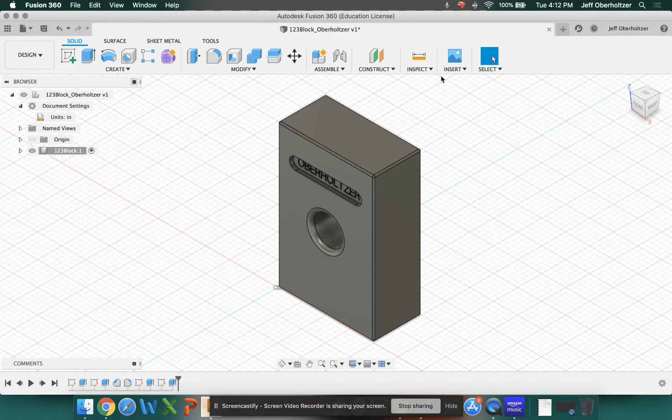For our block, we want to punch a series of holes down through this side. In order to do that, we go up to the top left corner to choose Create Sketch, the green plus mark. This time we want to choose the tall face, this one right here of our object. I'm going to click there when it highlights.

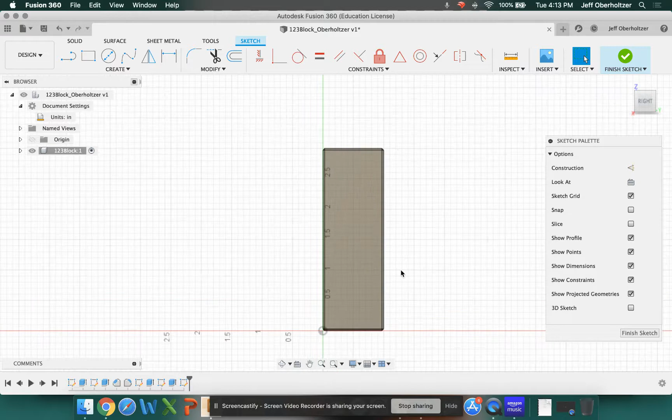Now we're going to create a series of holes down through the side. We only need to draw one though. In the past, I've told you measurements for different things, but this time we're just going to draw one, and I'm going to show you how to position something using the dimension feature.

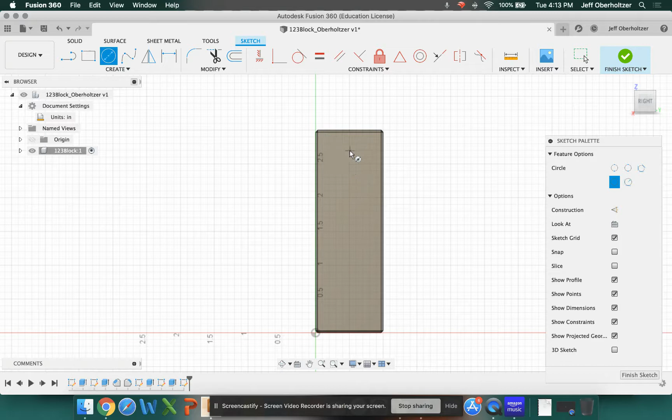The first thing we want to do is choose our circle, so center diameter circle. On purpose, even though I want it to land in the center, I'm going to draw it kind of off to the corner. You don't need to do this, but it's just to illustrate what I'm doing a little better. I'm going to select a random point and pull away with my mouse.

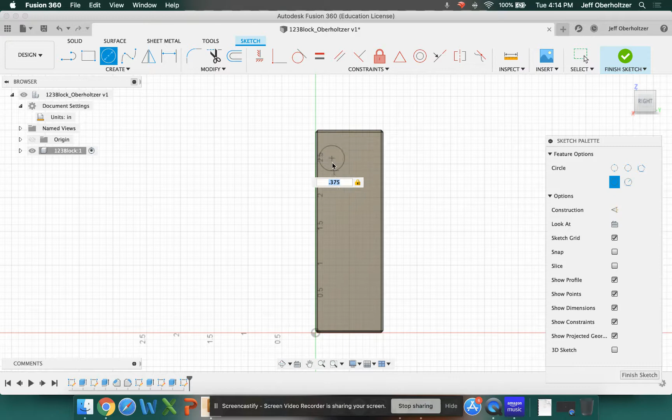I want the diameter of this circle to be 3/8 of an inch, or 0.375. Now, at this time, this circle is not positioned where I want it. I'm just going to hit return, and you'll notice it's off here to the side.

What we're going to do now is use our dimension feature, which is right up here - it looks like an H. You're going to click Sketch Dimension, and the first thing we want to do is get our hole centered. If I hover over the edge of this circle - I don't recommend that you use the center point, click on the edge of the circle. Fusion will understand what you're going for. When it highlights, click on it.

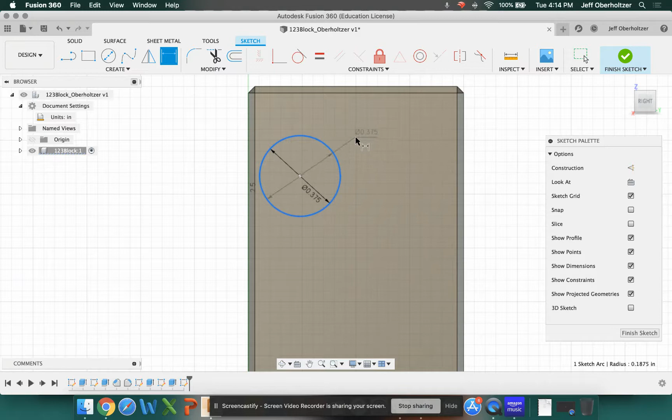Now it's asking me for a diameter, but I don't need to do that. I'm going to choose the outer edge, and it actually doesn't matter which one you use, but make sure you don't pick up the chamfered edge. Pick up the outer edge right here - it'll turn black, click once. Now you'll notice if I drag up, I have a dimension attached to that.

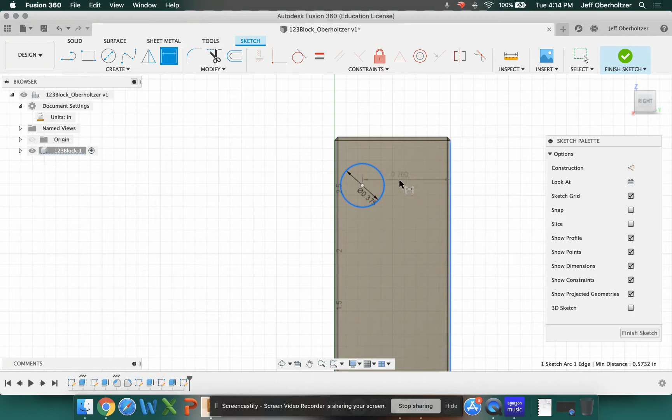And that's exactly what I want. Move it off of your drawing - you can do it on your drawing, but it's poor practice. When you click one time, it's going to request a dimension. I want it to be centered, and we know our block is 1 inch thick, so half of that would be 0.5. When I hit enter, watch what happens to the circle. It has referenced this outer edge, and it's moved the circle. Now that's exactly a 1/2 inch, and it's locked there.

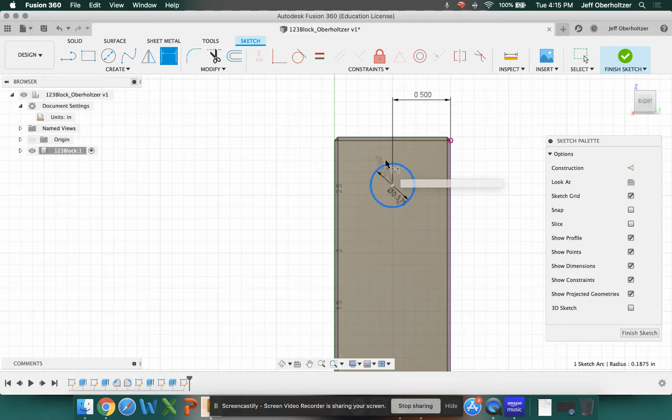The next thing we're going to do is make this circle a 1/2 inch from our top edge. I'm still in the dimension function - you notice my cursor has that dimension line on it. If I choose the circle again, and then choose this top edge, it turns black. Now when I pull out to this side, I have another dimension. When I click, I'm going to type 0.5 and hit return. That has now properly located that circle a 1/2 inch down from the top and a 1/2 inch in from the side.

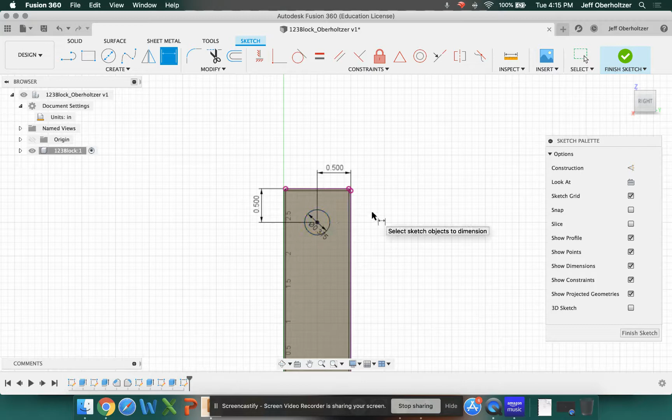At this point, we're now going to create a rectangular pattern. We're going to go under our Create tab. Down here towards the bottom, you'll see Rectangular Pattern - I'm going to choose that. The first thing it's asking me is for objects, so all I want is the circle.

Now you'll see that there are arrows, and if I wanted to, I could drag those. You'll notice it automatically creates a pattern, but I don't actually want that. I want to type in my references for this. So what we can do - this one says direct distance type extent. That's what we're going to use this time, and it will automatically spread them out in that extent.

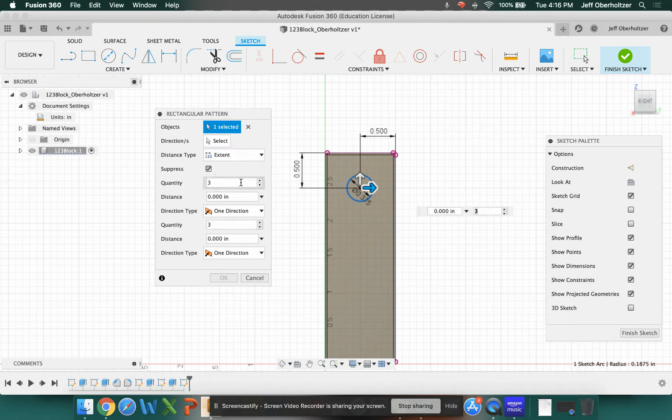I don't need my quantity going across to be more than 1, so I'm going to change that to 1. The distance is 0 inches. Now I want my second quantity down here to be 4, and my distance is going to be -2.

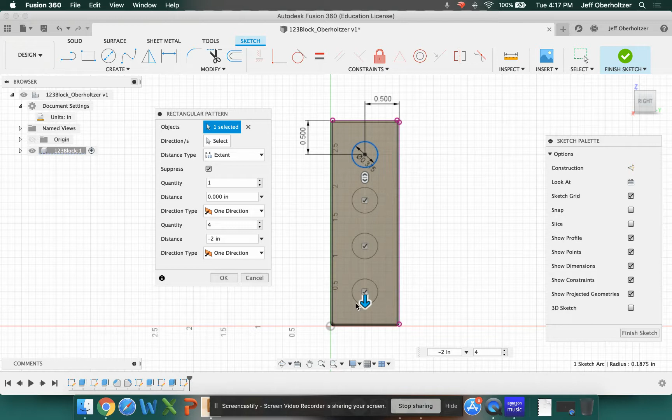Now, if you don't think that's working correctly, notice that they're perfectly centered down through here. At this point, I can choose OK, and I now have 1, 2, 3, 4 circles evenly spaced down through there. I'm going to select Finish Sketch.